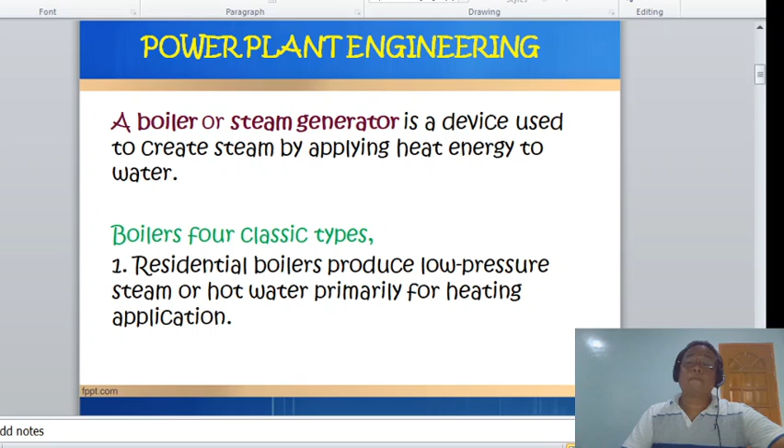We have here the four classic types of boiler. One is the residential boilers, which produce low pressure steam or hot water primarily for heating application. Another is the commercial boilers, which produce steam or hot water primarily for heating application and commercial use.

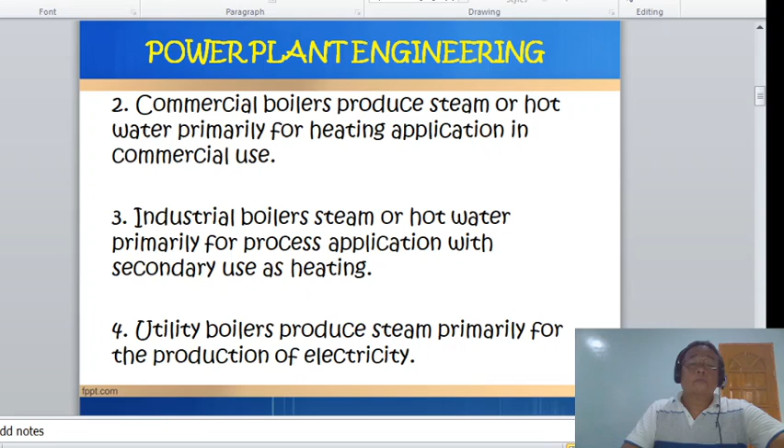The third one is the industrial boilers, producing steam or hot water primarily for process application with secondary use as heating. Another is the utility boilers, which produce steam primarily for the production of electricity. So we are going to concentrate more on these types of boilers.

We have here the major components of the industrial or utility boilers: the furnace, where the fuel is burned, the boiler section, the superheater, the air preheater, and the economizer. These are the basic parts or major components of the utility or industrial boilers.

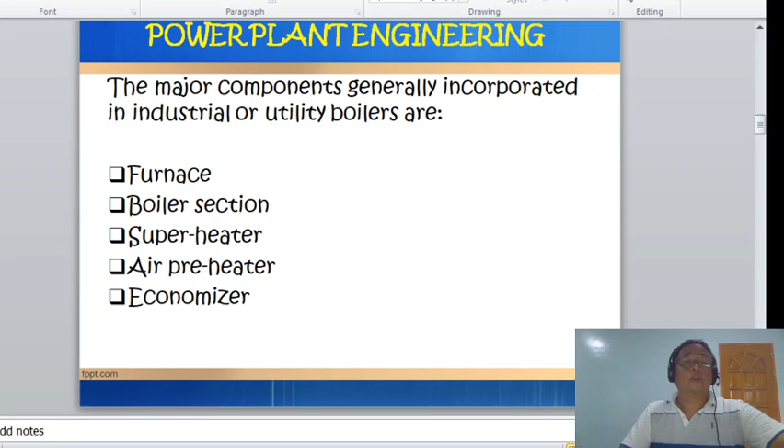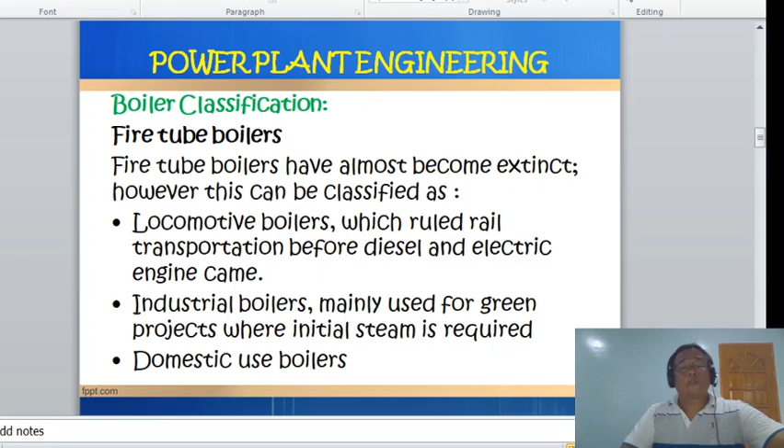So we have two classifications. The first is the fire tube boilers, which have almost become extinct. This can be classified as locomotive boilers, which ruled rail transportation before diesel and electric engines came; industrial boilers mainly used for green projects where initial steam is required; and domestic used boilers. So that is for fire tube boilers.

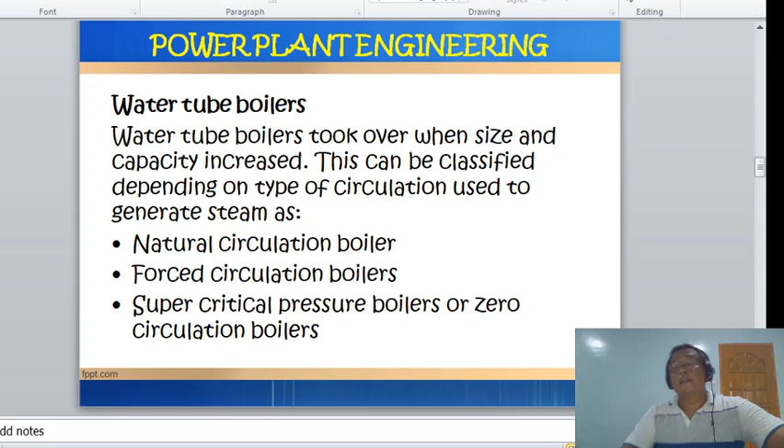Another is the water tube boilers, which took over when size and capacity increased. This can be classified depending on the type of circulation used to generate steam. So we have the natural circulation boiler, forced circulation boilers, supercritical pressure boilers, or zero circulation boilers.

Let us now go to the concepts of boiler. The concept of the developed boiler horsepower, or DBHP.

One DBHP is the evaporation of 34.5 pounds of water, equivalent to 15.646 kilograms of water per hour, from a temperature of 212 degrees Fahrenheit or 100 degrees Celsius into dry saturated steam at the same temperature. So one developed boiler horsepower is equivalent to 35,291 kilojoules per hour.

This is the same as, for example, a large open boiler or a drum filled with water, applying heat to the bottom of the drum. At the end of 1 hour, the amount of water evaporated is equivalent to 34.5. Take note that if the drum or boiling drum is open, the temperature is at 212 or 100 degrees Celsius, and the pressure is atmospheric pressure. So that is equivalent to 1 developed boiler horsepower.

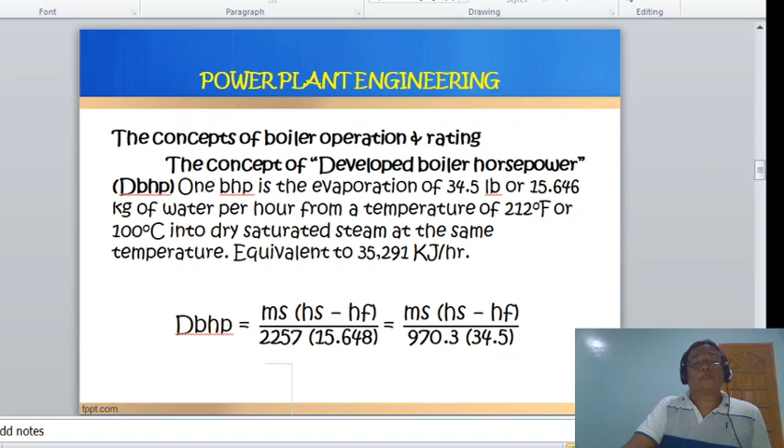Another concept we have is the equivalent evaporation. This is feed water at 100 degrees Celsius converted to dry saturated steam at 100 degrees Celsius. So, accordingly, 1 kilogram of water at 100 degrees necessitates 2257, which is also equivalent to 970.3.

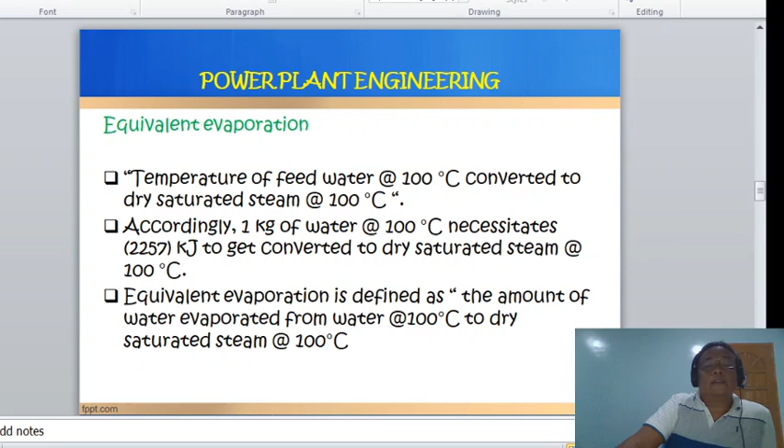So, equivalent to the dry saturated steam at 100. Equivalent evaporation is defined as the amount of water evaporated from water at 100 degrees Celsius to dry saturated steam at 100 degrees Celsius. So we have the so-called equivalent evaporation, or EE.

The heat gain by the steam from the boiler, per unit time, is Q. This is the heat supplied to the boiler. That equals the mass of steam generated multiplied by HS, the enthalpy of saturated steam, minus the enthalpy of water.

The equivalent evaporation now equals the mass of steam multiplied by the change in enthalpy divided by HFG. Or simply, MS times HS minus HF over 2257. Or simply, that also equals MS multiplied by the change in enthalpy over 970.3.

Since HS minus HF over 2257 equals the factor of evaporation, we now say the equivalent evaporation equals the mass of steam multiplied by the factor of evaporation.

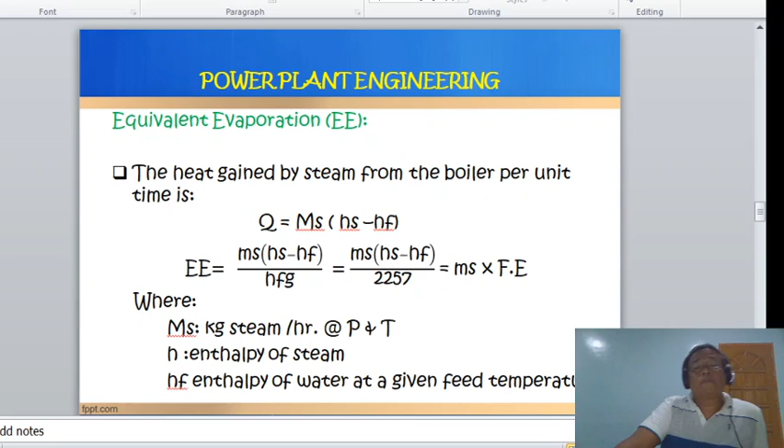So there are several terms you need to familiarize yourselves with, in order to master calculation in boilers. Another is the so-called factor of evaporation, as I said a while ago.

Factor of evaporation is defined as the ratio of the heat received by 1 kilogram of water under working conditions to that received by 1 kilogram of water evaporated from and at 100 degrees Celsius.

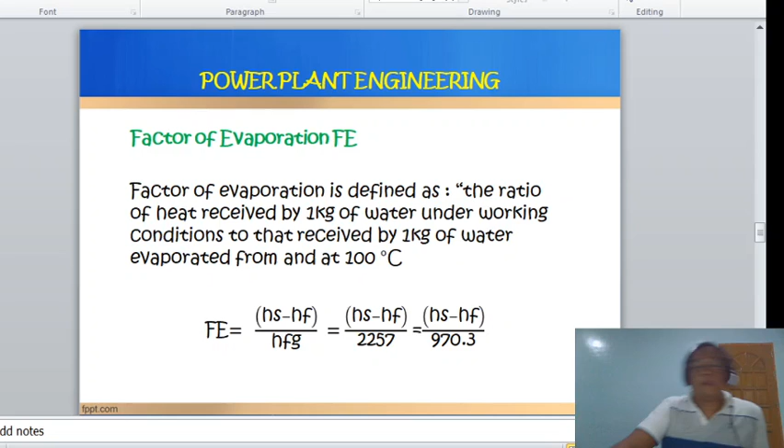That is equivalent to the change in enthalpy, or the enthalpy of the saturated steam minus the enthalpy of liquid, over the enthalpy HFG, or 2257. So that equals FE, or factor of evaporation.

Another is the boiler efficiency. Boiler efficiency is the ratio of the heat actually utilized in generation of steam to the heat supplied by the fuel in the same period.

So ηB equals the mass of steam multiplied by the change in enthalpy at the boiler side, divided by the mass of the fuel supplied to the furnace multiplied by its heating value.

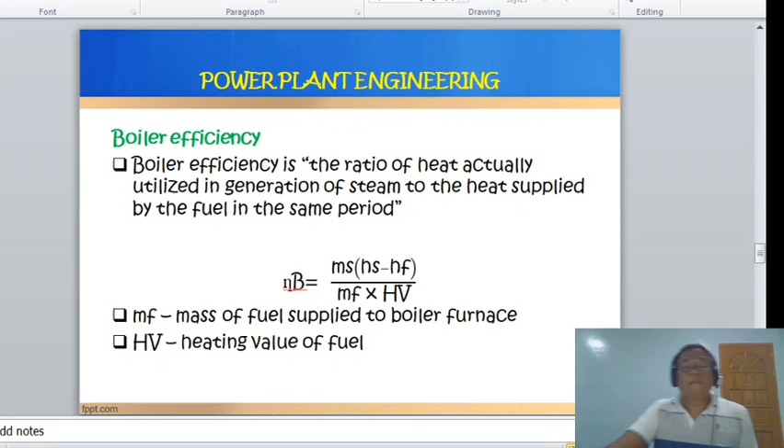Take note: heating value. In boilers, we sometimes use coal-fired, or sometimes diesel-fired. So determining the heat supplied to the boiler equals mf times HV.

We are now going to use the Dulong's formula here. The heating value equals 33,820 multiplied by the carbon content of the coal, plus 144,212 multiplied by the hydrogen content of the coal minus oxygen over 8, plus 9,304 multiplied by the sulfur content of the coal. That is for heating value.

The rated boiler horsepower for a water tube boiler equals the heating surface divided by 10 square feet. In order to obtain one rated boiler horsepower, it requires a heating surface of 10 square feet. So for the total rated boiler horsepower, that is area in square feet divided by 10.

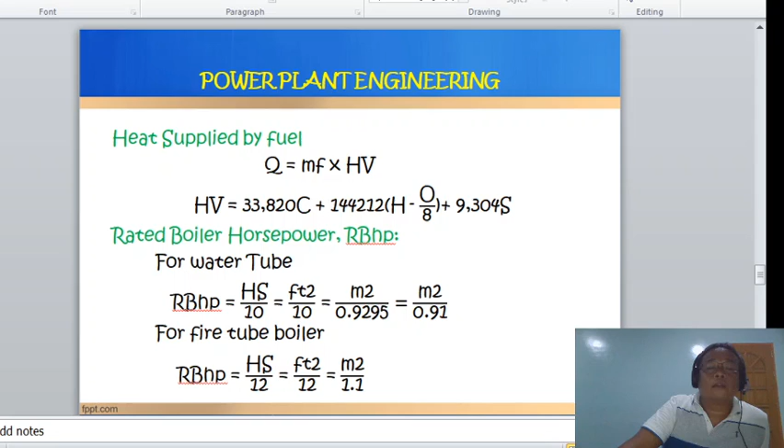For fire tube boilers, that is heating surface area divided by 12, that is heating surface area in square feet divided by 12 square feet. Or simply in square meter, that is area in square meter divided by 1.1.

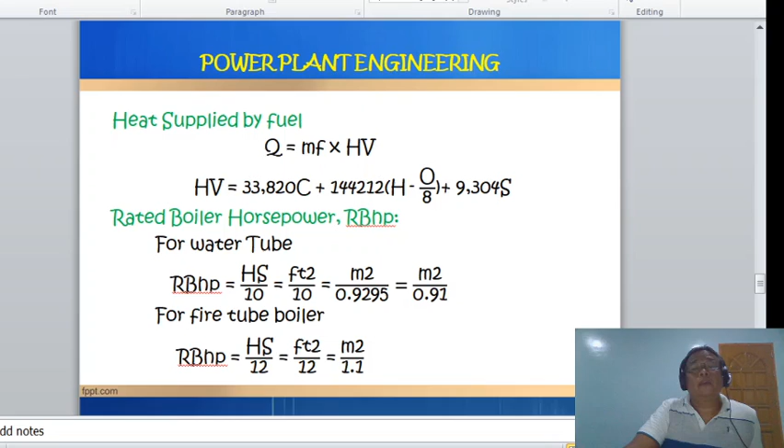Another is percent rating. Percent rating is the ratio of the developed boiler horsepower divided by the rated boiler horsepower.

And for ASME evaporation units, that equals the mass of steam multiplied by the change in enthalpy of the saturated steam and the saturated liquid.

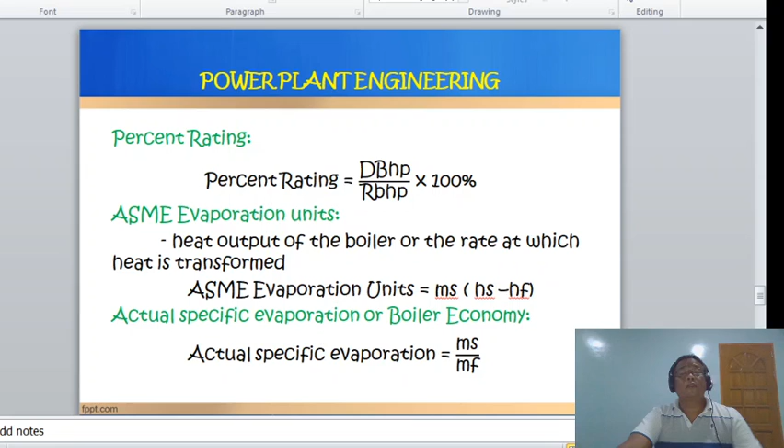And another, the actual specific evaporation, or the boiler economy rather, equals the mass of steam divided by the mass of fuel.

So the equivalent specific evaporation now equals the mass of steam over mass of fuel, multiplied by the factor of evaporation.

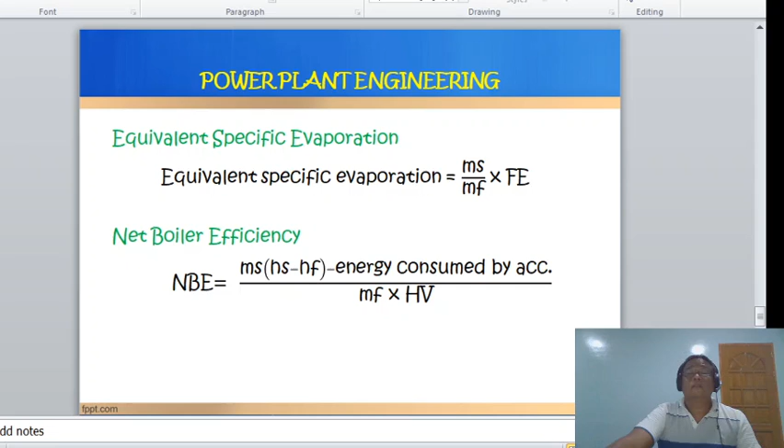And for the net boiler efficiency, that equals mass of steam multiplied by the change in enthalpy, minus the energy consumed by the accessories of the plant, divided by the mass of fuel, multiplied by HV, or the heating value of the fuel.